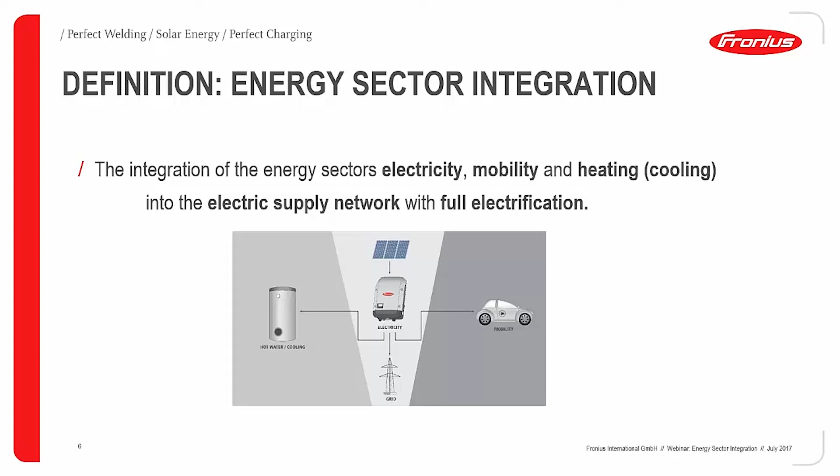Now, what's energy sector integration? The definition is the integration of the energy sectors electricity, mobility, and heating. And we combine all that into the electric supply network with full electrification. That's the definition.

Basically, why do we need it? The target of the Paris Climate Conference in 2015 was that we want to limit global warming to a maximum of 1.5 to 2 degrees. To achieve this target, we need 100% CO2 neutral energy supply. And that's for all energy sectors, and the easiest way to do that is with the electrification of all these energy sectors.

So how do we do it? There are 3 pillars, as you can see. First, we need to have 100% renewable electrical energy. That's done with solar PV, wind power, hydropower, and also other power sources. So a full 100% renewable energy.

Second pillar, we need energy storage. That's important because we don't have this energy available all the time. So we need to have storage. It can be battery storage, it can also be the EVs as storage, or power to gas, power to liquid, pumped storage stations, and heat storage.

And then that's the energy supply, but we also need energy management. And under energy management, we understand intelligent systems, smart systems, load management to start consumers whenever we have enough energy, smart grid controls. All the energy suppliers need to be controlled by this system, and smart and highly efficient consumers as well. That's also important. And all of that, actually, we are already working in these segments.

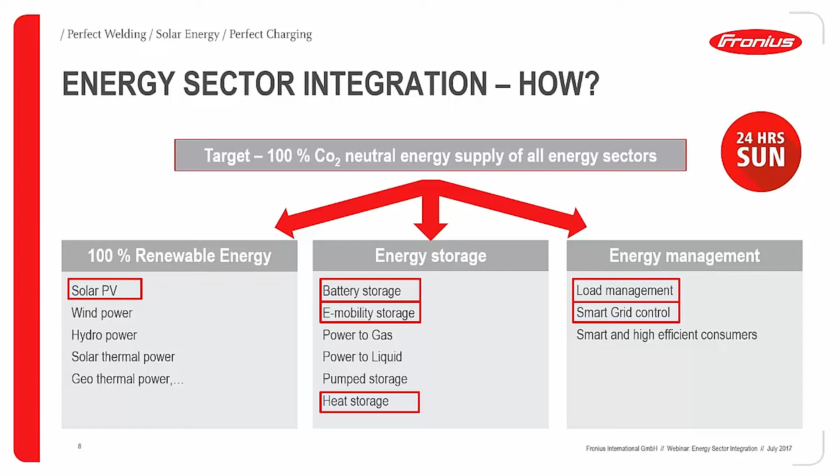If we look at the projected world energy supply and demand, we have a study from the universities in Stanford and Berkeley, where they tried to find out how the transition from now to 2050 can be achieved to reach 100% renewable energy supply. At the moment we have about 90% fossil energy. So that's fuels, biofuels and nuclear. So only 10% is wind, solar and hydropower. So that's the first step. We need to replace these power stations with renewable energy.

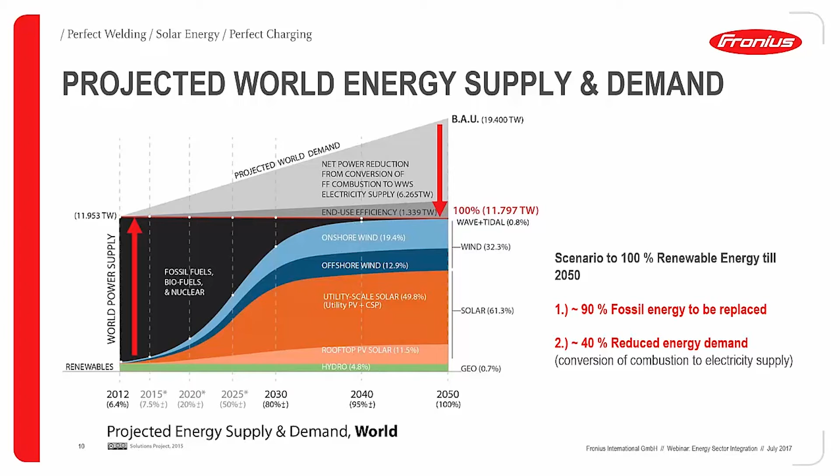Then, on the other hand, if we go to full electrification, we can also reduce the energy demand by about 40%, because the conversion from combustion to electricity is more efficient. So electrical consumers have a higher efficiency, for example, if you think of EVs, they are also very efficient. We can reduce the energy demand by 40%, and finally we will end up in 2050 with more or less the same energy demand. And that's all now electricity. So from now, with a lot of combustion, to full electrification.

Now we already see this trend of electrification. End customers are moving away from gas and oil to electricity. They make their hot water now with a hot water heat pump or an electric hot water boiler. They produce their heating and cooling of the room with a heat pump or an air conditioner instead of gas, oil or coal heating. They also use an electric stove for cooking, not a gas cooker. They use more and more electric vehicles for mobility in the future and go away from gasoline and diesel.

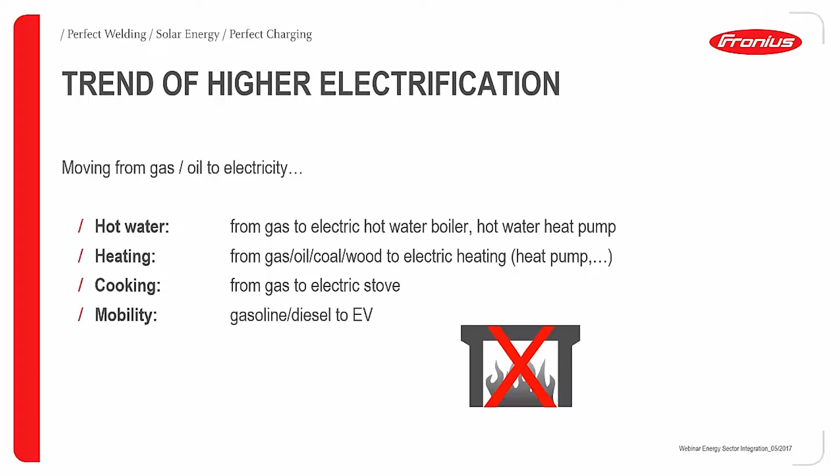So if we look now at the average power consumption of a 4-person household, we see that more than half of the total energy per year is coming from heating. So that's an example from mid-Europe. So we need most of our energy for heating.

And here, for example, with the gas heating, we need 15,000 kilowatt hours per year as an average. Then we need about 9,000, 1/3, for mobility; this is now only one diesel car. And then we need for electricity an average of about 5,000 kilowatt hours per year as well. So in total we have an energy consumption of 29,000 kilowatt hours per year.

If we go to 100% electricity, so if we convert the energy from the gas heating to a heat pump with an Ohmpilot, which I will show you later, a device to produce hot water, we can reduce the energy down to 6,000 kilowatt hours for heating. Then as well for the mobility, we reduce the energy demand from 9,000 to 3,000. So an electric vehicle is about 3 times more efficient than a standard diesel car.

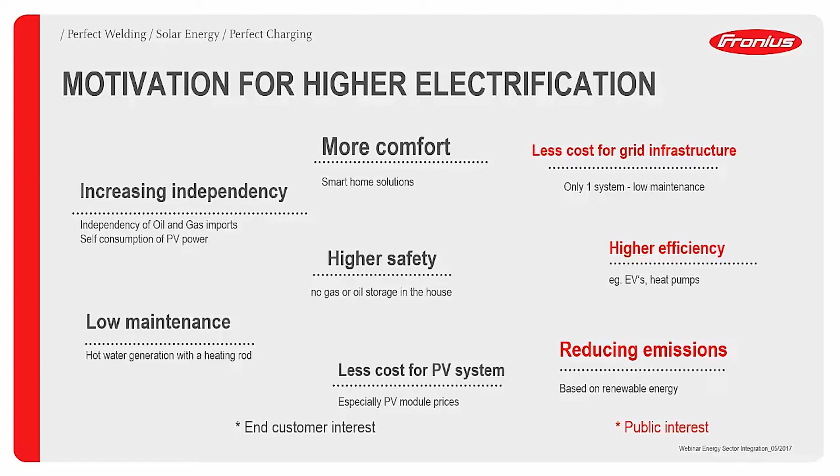Now I'd like to show you the Fronius solutions. First, the working steps, how we come from a consumer to a prosumer, so a person producing its own energy and using its own energy. We're starting, that's our recommendation, with a PV system, Fronius inverter, with a Fronius smart meter, and we do the analysis with that of the consumption of this building.

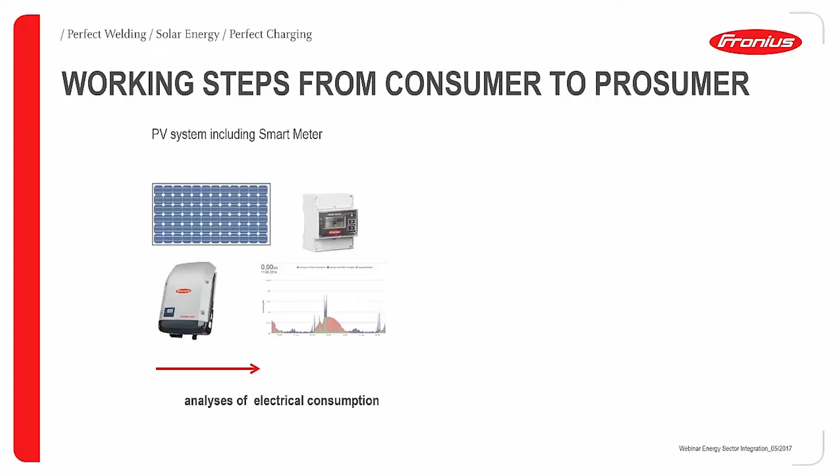So after a few months or weeks, we can see what consumers are running, at what time, at what power level, and with that analysis we define a big load, for example a hot water boiler or heat pump or an EV, and we start that with our load management from the PV inverter to start these consumers at the moment when we have surplus energy.

And then we have, of course, still some rest energy available, and this will be used for hot water storage with the Fronius Ohmpilot. So we're producing hot water with this energy, or we store the energy in a battery, in our Fronius solar battery, for example.

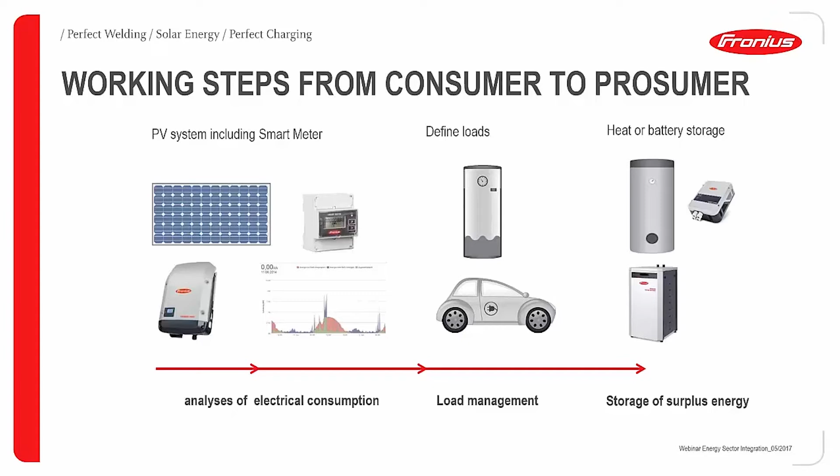What self-consumption rates and what self-sufficiency is possible with that? On a 4-person household, again, 5,000 kilowatt hours per year consumption. If we have a 5 kilowatt peak PV system, usually our self-consumption is only at around 20 to 30%. Also the self-sufficiency is around the same level.

If we do energy management, load management, we can increase the self-consumption up to 40-50%, for example, with a heat pump integration or an EV integration. Also self-sufficiency is then increasing. Another possibility to increase your self-consumption rate is to use battery storage. So for example, here with a 5 kilowatt hour battery, we increase the self-consumption up to 60-70%, and the self-sufficiency is also increasing up to a level of around 60%.

Or the other possibility is the Fronius Ohmpilot. We produce hot water. We have a 500-liter hot water tank. With the Ohmpilot we are heating hot water at the moment when there is power available, and with that we increase our self-consumption to levels of more than 70%, up to 80% self-consumption rate.

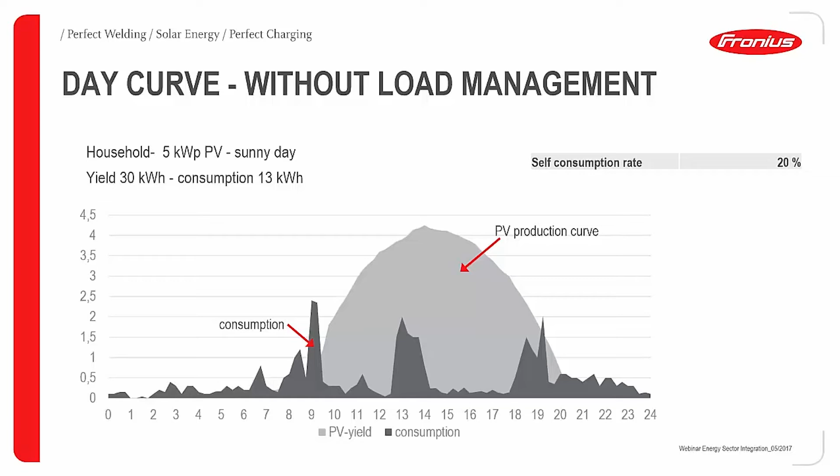So what can we do? We, for example, have an EV which is available in the afternoon. We start the charging process of this EV in the afternoon, for example here from 12:30 to 6:30, and we use a lot of our energy on this sunny day from our PV system. With that, we increase our self-consumption rate up to 50% already.

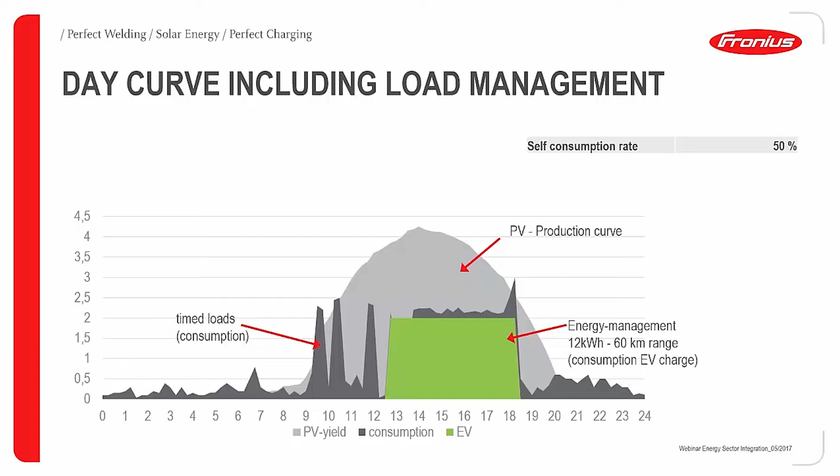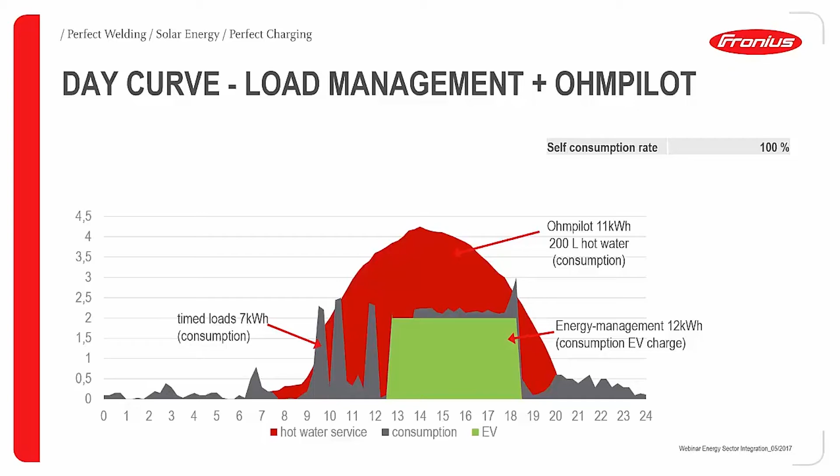A next step would then be a combination with the Fronius Ohmpilot. So we use the surplus power, which is now the red part of this curve, to produce hot water with the Fronius Ohmpilot. This is about 11 kilowatt hours for the rest of this day, and with that we can produce 200 liters of hot water at 60 degrees. And the nice thing about that is we increase our self-consumption rate on that day to 100%. So we use all our energy in this building.

A similar additional possibility is with load management and battery. So all the surplus energy is now used in the battery. We charge our battery with this power. For example, here we have a 9.6 kilowatt hour battery. We charge the battery on that day, so we can use nearly all the rest energy, these 11 kilowatt hours. There's just a small rest at the end of the day that we need to feed into the grid, but most of the power is used as well. Our self-consumption rate is 95%.

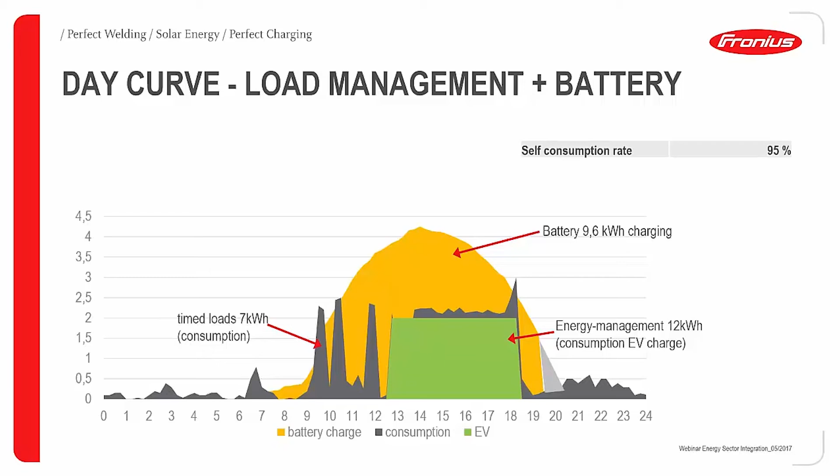And here the big advantage is we use the energy at nighttime. So for our consumers at nighttime, we can use the battery as well. Probably we can charge the EV once again in the evening or at night to get more of our power to the EV or to our consumers. So these were the advantages or the solutions for the residential sector.

Then another commercial solution is EV charging. So we have a company with 10 EVs, for example, and they have 10 wallboxes where they are connected. They are going for a small trip every hour to another office, for example, and coming back again will be charged again. So it's a continuous charging process during the daytime as well in this moment.

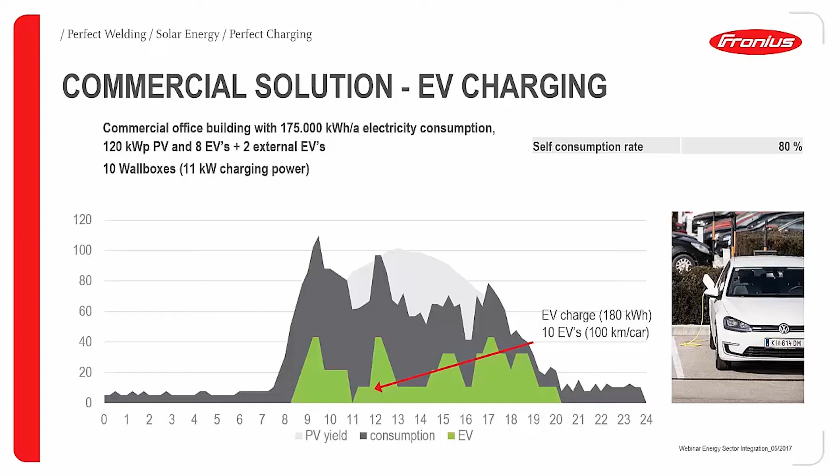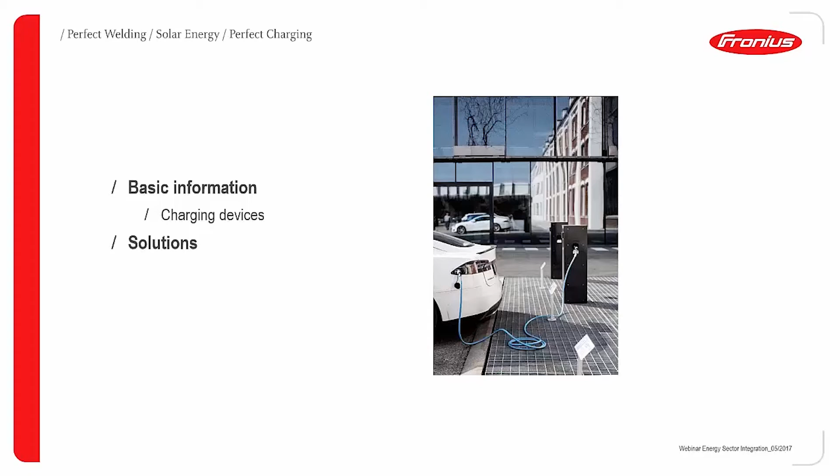Now I'd like to go into detail about e-mobility, some basic information and as well the solutions, how to charge an EV from your PV system. There are generally two possibilities on the residential side. We use our standard socket in the garage for single phase, for example, the CEE Cara socket recommended, especially if you go more than 2.3 kilowatt, and three-phase, the standard CEE three-phase socket in the garage is needed.

And then we can adjust on the charging cable the power, for example, a power of single phase 3.6 kilowatt with 16 amps, and with three-phase, for example, 4 kilowatt, and we should lower the charging power as well. So we need to set the power on the cable to a lower level because we want to use our PV power, and usually in a standard residential building we don't have too much PV power, so probably maximum 5 to 8 kilowatt peak, depending on the roof space of course, but usually that's a kind of limitation. So we set our current to a lower level and charge our car with the power from a PV system at a slow charging.

Or another possibility, of course, is charging from a wallbox. They are made for these solutions as well. They give a bit more comfort, so they can also be used on single phase or three phase, and you have some advantages to control the energy as well, which I will show you on the next slide.

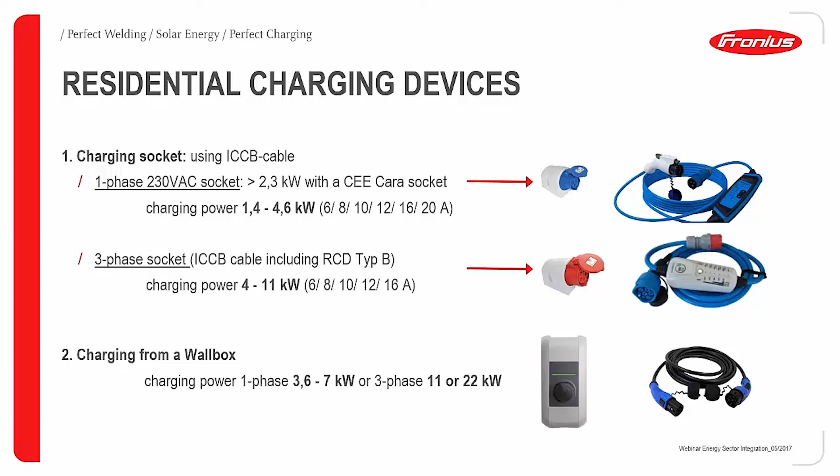On the other hand, of course, this is a high power charging process, for example 22 kilowatt, and if you use a wallbox, they will always charge at high power, and you are then probably not using too much of your PV power. So it's probably recommended with a smaller PV system to limit the charging power, which you can easily do with these charging cables, the first two on top.

What solutions can be offered? First, the EV charge socket controlled by the digital I/O from the Fronius Datamanager, which is inbuilt in all our SnapINverters. This is for a smaller PV system below 10 kilowatt peak. We have a 12 volt relay which is started from the I/O of the inverter, and this relay will start the charging power on the socket, single phase or three phase.

And what we additionally do in this case, we start the charging process during daytime. Whenever the car is available during daytime, you get your PV power to charge your electric vehicle. But additionally, we have a night charge programmed in the inverter, where we can also charge from, for example, midnight till 6 o'clock in the morning. So with that, we make sure that you get your range requirement on the next day, and even on a day where you arrived later in the evening or a very dark, cloudy day, you are sure to have your car charged in the morning.

Additionally, we recommend a manual switch where the customer can start the charging process during daytime immediately whenever he needs immediate fast charging.

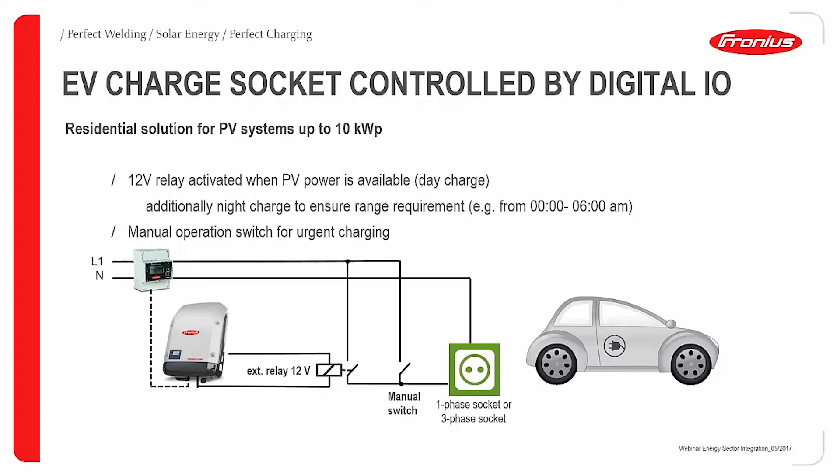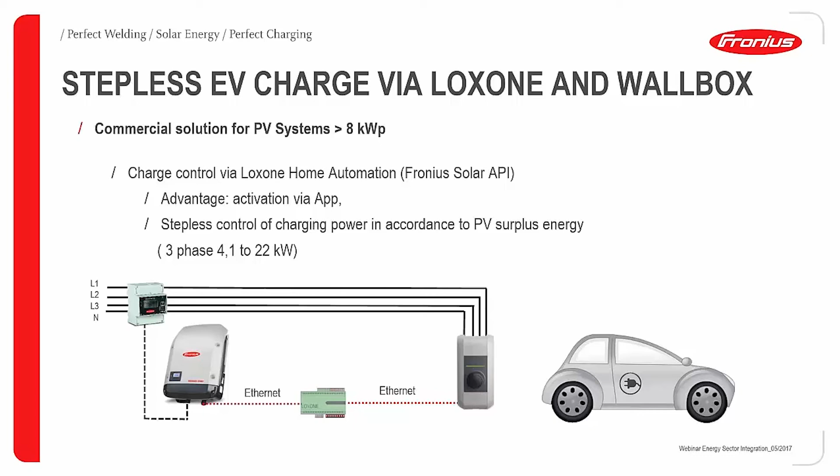Yeah, these are the two solutions. Then for a heating or hot water service, we have another few solutions which I would like to show. First, the electric heating devices, heat pump and so on, how to control that. And then the OHMIC heating devices with the Fronius Ohmpilot.

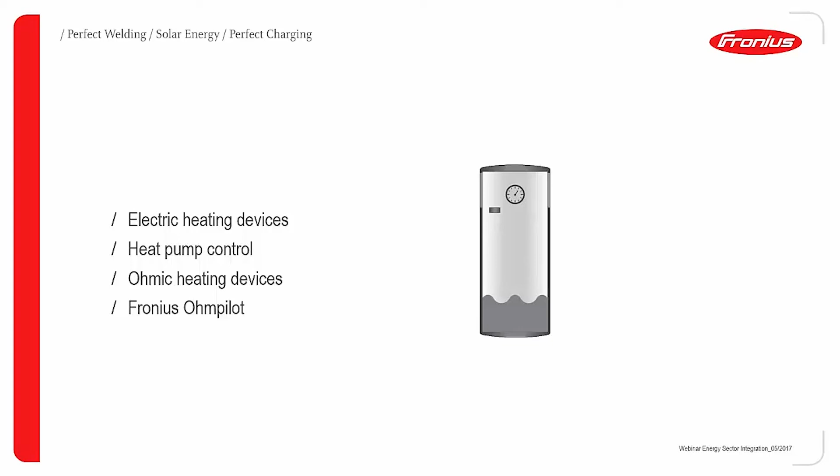Standard heat pumps, for example, or air conditioning, like the heat pump shown here, are very efficient. They use only, for example, 1 kilowatt hour of electrical energy to produce 4 kilowatt hours of heat. So they are very, very efficient. Hot water heat pumps and air conditioners are not as highly efficient, but they're also more efficient than a standard heating source.

What's important is that these heat sources need to be controlled by the Fronius energy management, our load management. What we're doing is using this digital I/O with a 12 volt relay to start the smart grid ready heat pump. It must be a smart grid ready heat pump. Please check the label of your heat pump - you'll usually have an input with 2 cables, a contact where you get the increased temperature mode. Whenever you activate that, the heat pump will increase the temperature, for example the hot water temperature from 40 degrees to 55 degrees.

After that, if the hot water tank is full at 55 degrees, you can also use this contact for heating or cooling. Some heat pumps can also cool down the house, so after hot water generation you can use the energy for cooling in summertime, or for heating in springtime. This is done automatically by the heat pump, which regulates according to outside ambient temperature or indoor temperature. This is all integrated in our inverters' output - just make sure your heat pump has the smart grid ready label, and then you can use your PV power for your heat pump.

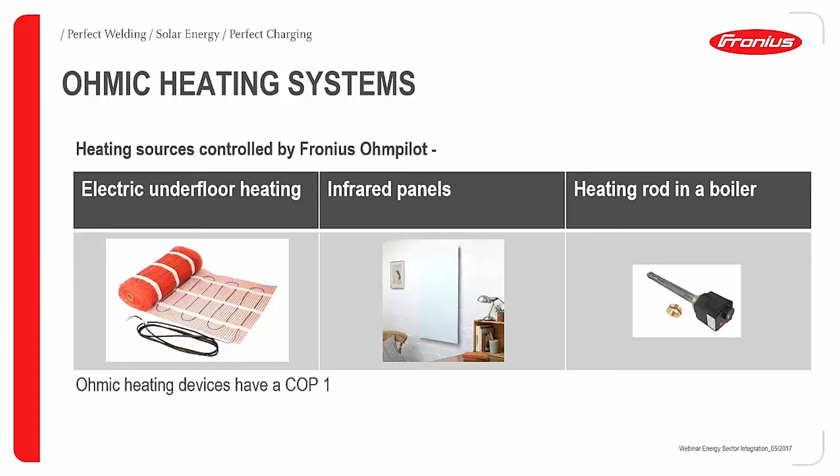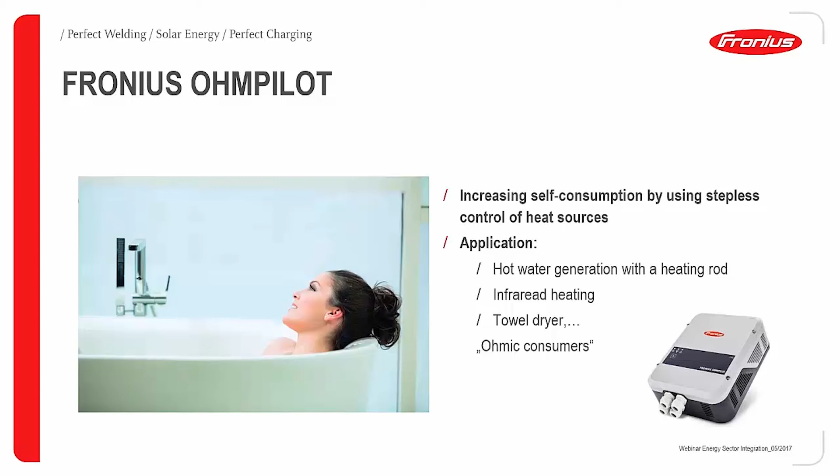Yes, and that's done with the Fronius Ohmpilot. The Fronius Ohmpilot increases self-consumption by using stepless control of heat sources - we're steplessly controlling the surplus energy for these heat sources. Applications include hot water generation with the heating rod, infrared heating, towel dryers, or electric floor heating as shown before. How is it working?

What components do you need? You need the Fronius inverter with Data Manager 2, a smart meter which measures the surplus energy, and then communication from the inverter to the Fronius Ohmpilot to tell it exactly, for example, here's 500 watts of surplus energy for the heating rod. Then you have no feed-in power - all power is used in the building, for the consumers and on the heating rod to produce hot water. Other devices you need: the Data Manager 2 in the Fronius inverter, the smart meter, and the Fronius Ohmpilot. A temperature sensor is optional, possible but not needed.

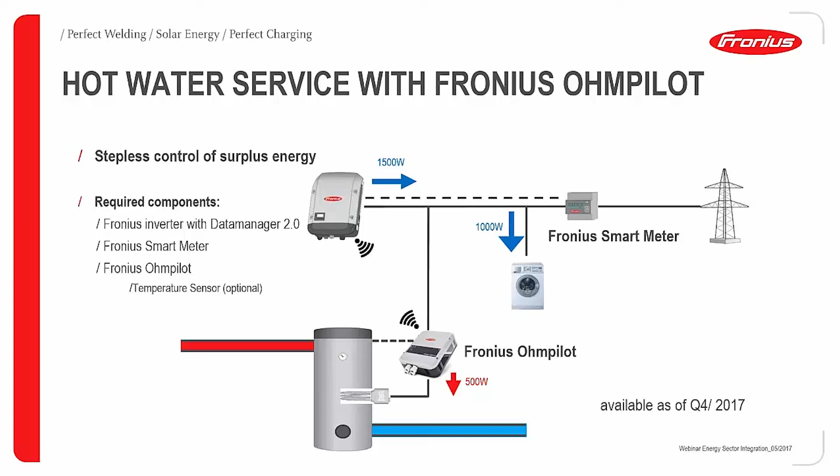This product will be available as of Q4 2017, and we will show it as well at Intersolar 2017 in 2 weeks. So if you're interested, please come and have a look at our booth.

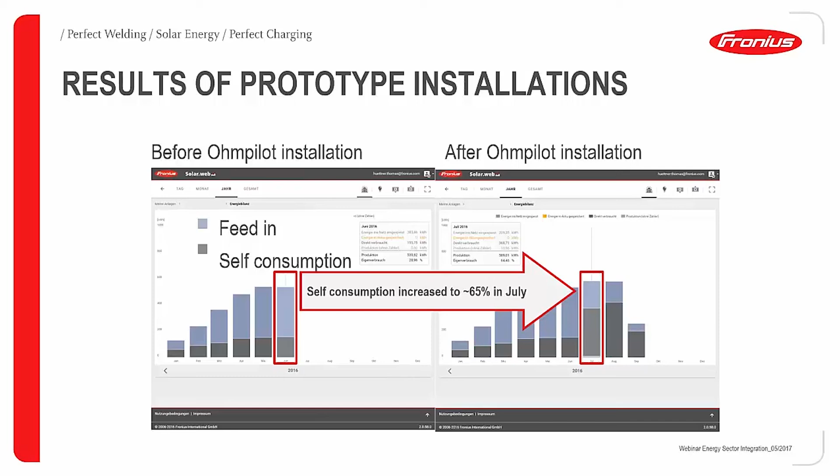On one hand side we have our Modbus RTU RS485 to connect smart meter, solar battery, and Ohmpilot. On the other hand, the LAN or Ethernet connection can be used for the Modbus TCP or the Solar API protocol to read out data for a third-party device, for example a home automation device or a third-party monitoring device. So these devices can read out the data from the inverter, surplus data or PV production data, whatever.

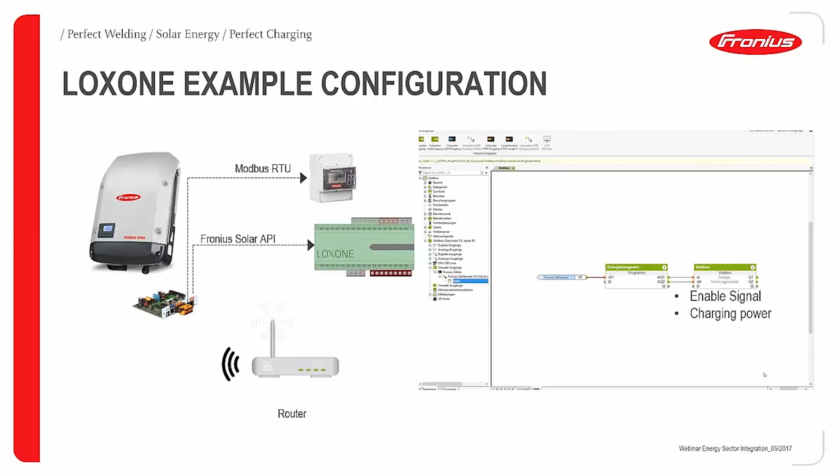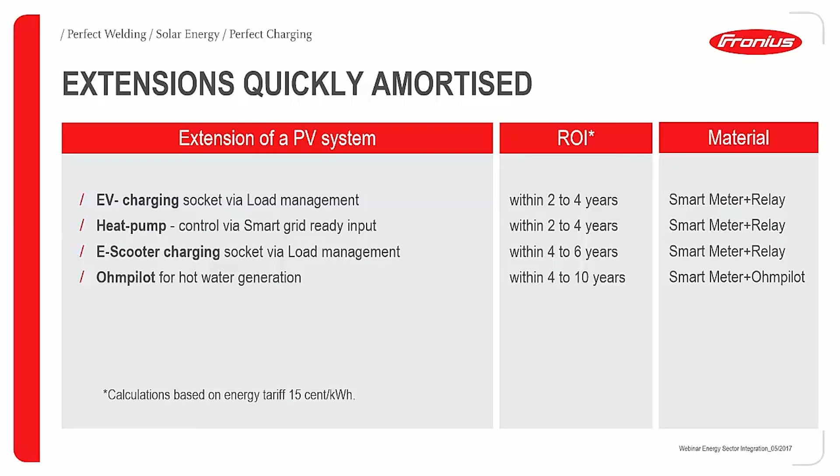Then a short summary again. All these extensions which I have explained are very quickly amortized, so you get a fast return on your investment. For example, the EV charging socket via load management within 2 to 4 years, and all you need is the smart meter and the relay. As well the heat pump similar, e-scooter charging similar, and the Fronius Ohmpilot for hot water generation, here you need the smart meter and the Ohmpilot. There you have a little bit longer return of investment, between 4 and 10 years is the ROI. All the calculations are based on the energy tariff of 15 cents per kilowatt hour.